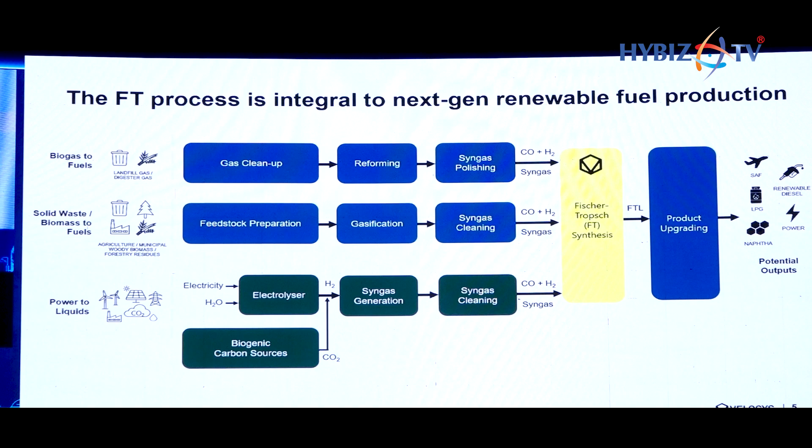This then needs to be conditioned to meet the spec of a roughly 2-to-1 ratio of hydrogen to CO for the Fischer-Tropsch synthesis path. The synthesis gas is then converted into Fischer-Tropsch liquids, which are then upgraded to SAF by cracking and isomerization. Second to that, we have the solid waste pathway.

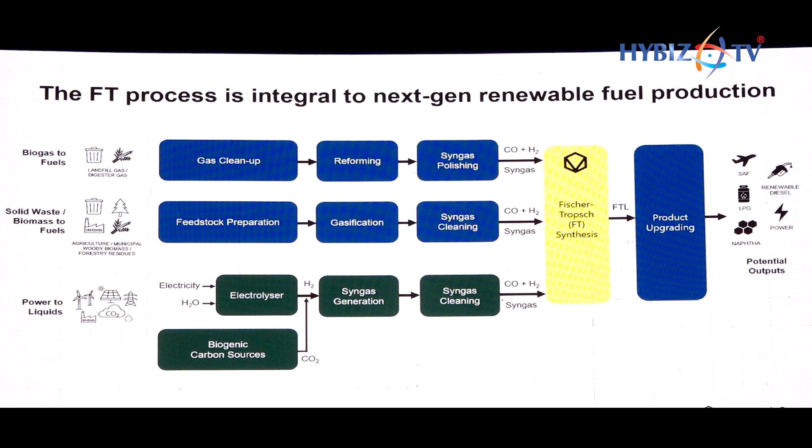In this pathway, you take solid waste, which is then gasified at high temperatures to produce syngas. This requires some cleanup to get it on spec, such as the removal of contaminants and adjustment of the hydrogen to CO ratio. This again leads into the same downstream processing through the FT synthesis and then product upgrading.

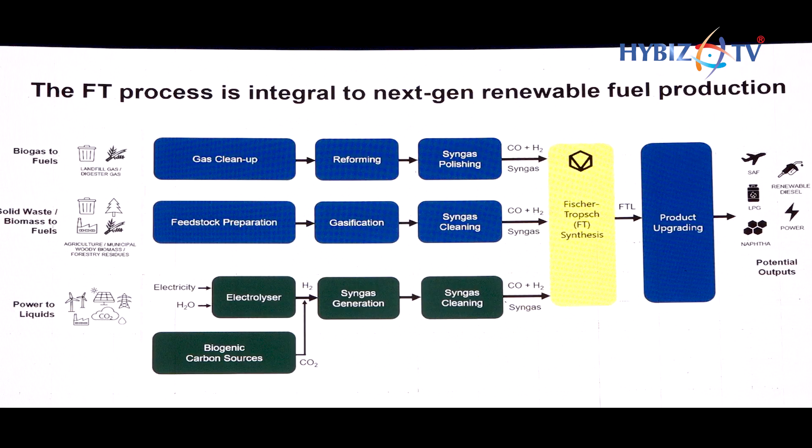And then finally, you have PTL. PTL uses green electrons to produce hydrogen from the electrolysis of water. This is then combined with CO formed from the conversion of CO2 from biogenic sources, which is then, again, converted into Fischer-Tropsch liquids through the Fischer-Tropsch synthesis process.

Okay, I just wanted to highlight that FT is an already approved and certified fuel, unlike some other pathways which are still pending their certification. Now moving on to how Velocys can help.

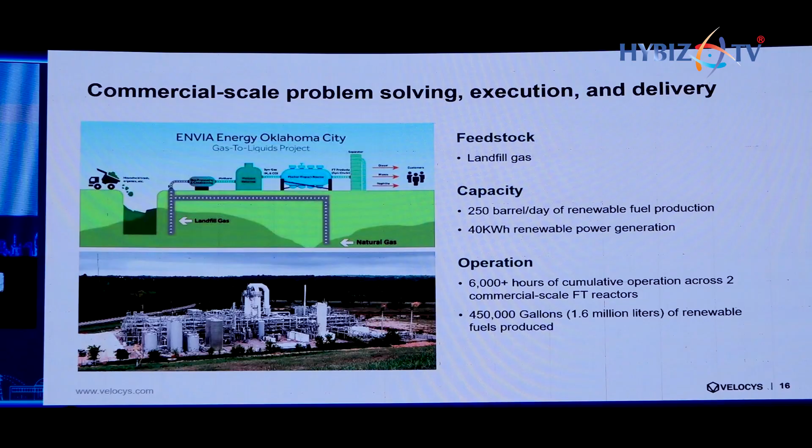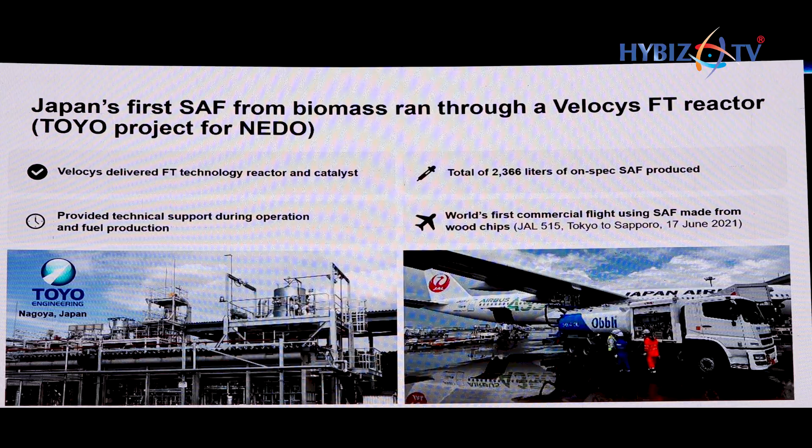We were also involved in a demonstration in coordination with Toyo and NEDO in Japan, in which fuel generated from our unit formed part of the first commercial flight using SAF from wood chips in 2021 between Tokyo and Sapporo.

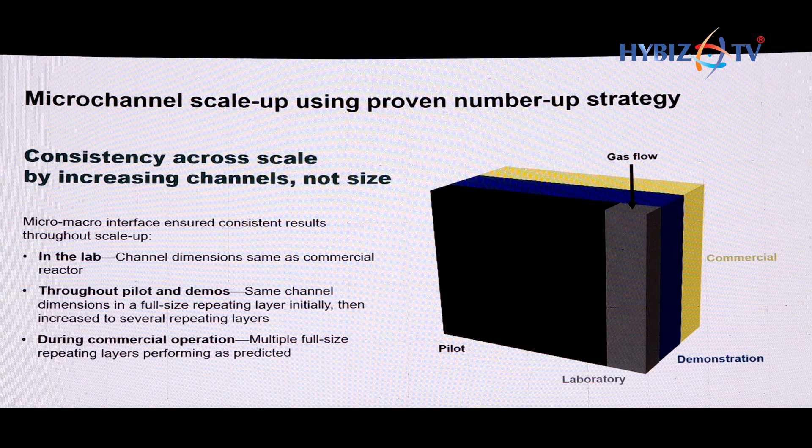The microchannel reactor scales up using a proven strategy. From the lab through to the pilot and the commercial, we use the same dimensions. What that means is that the results gained during our lab testing and through the demos are very representative of the commercial scale, and it scales up in a linear and predictable fashion, reducing risk.

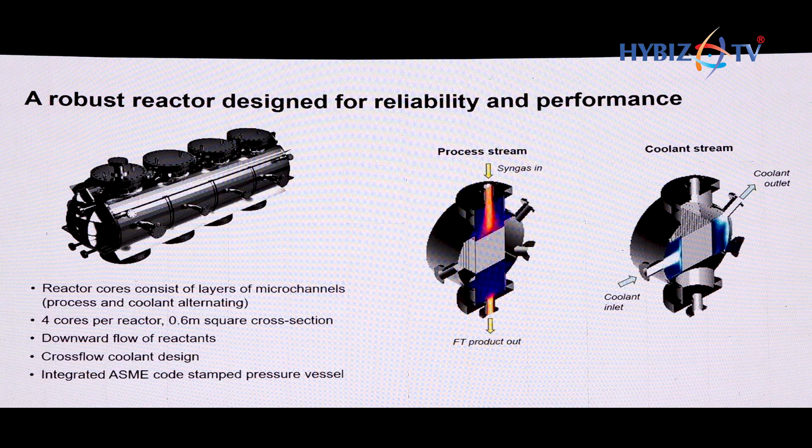What you can see here is our commercial size reactor. It's formed by 4 cores of alternating process and cooling channels. In the process channel, we have our catalyst packed in, where syngas flows down and out the bottom flow FT liquids. This is cooled by microchannels where boiler feed water is fed through and partially vaporized to remove the heat. This intimate design allows us to reduce hotspots and improve the selectivity and control of our reactor and manage the superactive catalyst.

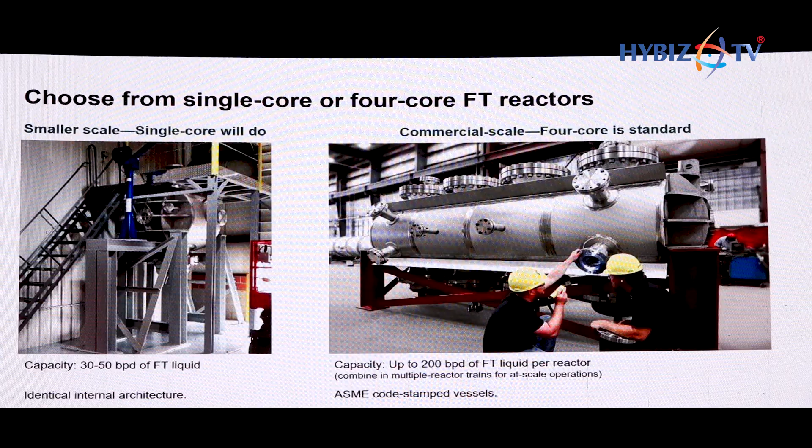Velocys offers a flexible solution. We have smaller single-core reactors suitable for 30 to 50 barrels per day of FT liquid production, and then we have a larger 4-core commercial reactor for capacities up to 200 barrels per day. These are then combined together in trains to scale up and to scale down to any of our customers' needs for their desired projects.

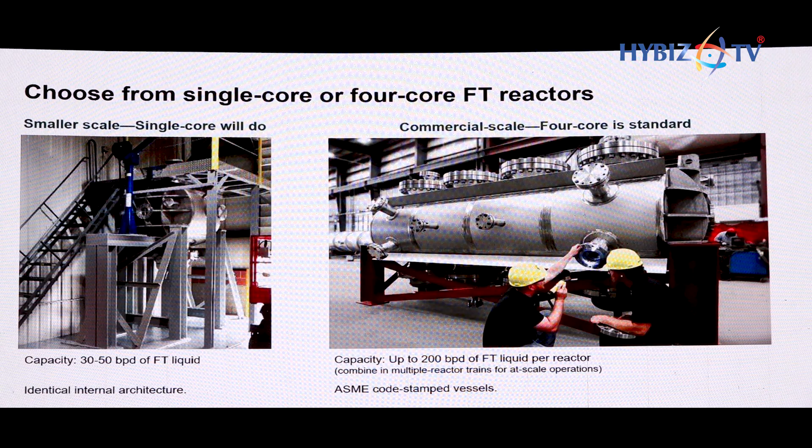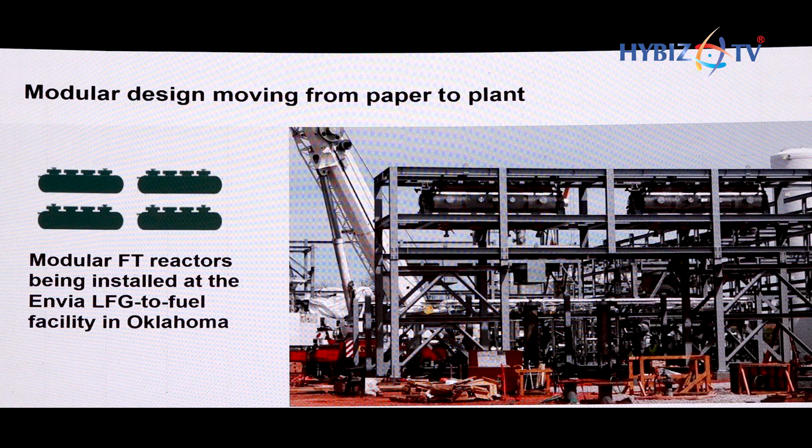Here we have our reactors being installed at the Envia location. As you can see, they're very small, very compact, easy to transport and easy to install. This enables us to deliver our reactors in a distributed manner where the source of syngas is, to provide FT liquids where they're needed.

Velocys' FT licensing model is taking off. Recently, we've announced our license being selected as preferred FT licensor for the Syzygy project in Uruguay, which is converting dairy-derived biogas into SAF via Syzygy's proprietary reforming technology. In addition, we're partnering with NextChem and their advanced gasification process for the waste to fuels project in Immingham, Altalto in the UK.

We're also continuing our relationship with NEDO and Toyo to continue the advancement of SAF projects in Japan, and we have a strategic partnership with Sekisui, an advanced CO2 to CO technology, to produce highly efficient power to liquids.

Post-HEFA, FT is your highest TRL commercially proven pathway to SAF, and Velocys is at the forefront of this. We've demonstrated our unit across the world with thousands of hours of commercial demonstration, piloting and lab testing. Velocys is ready today to help India meet its SAF demand through second generation, through technology licensing, FT reactor supply and catalyst supply. Thank you.